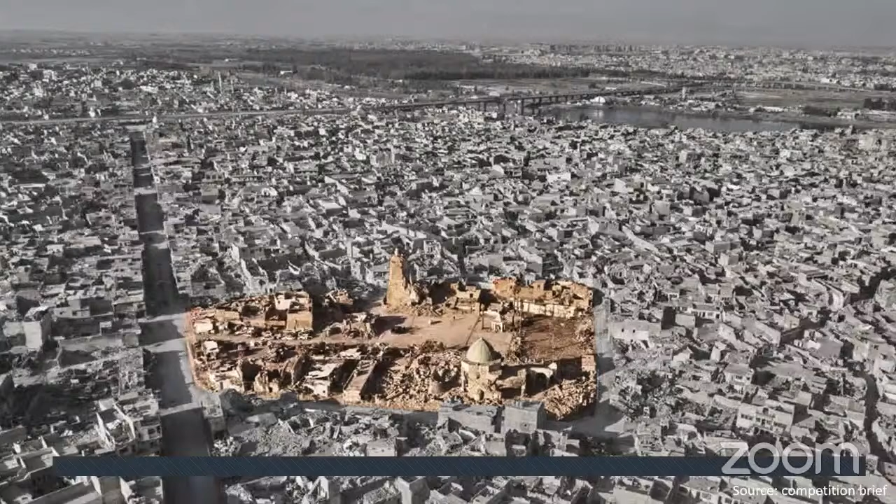So two issues were very important to us during the process of developing our proposal. Firstly, how could we come up with a project that would emphasize and empathize with the situation of the inhabitants of the city, which is certainly a devastated life. And secondly, how could we devise a proposal whose construction would serve to reinforce the bonds of the community, not only once it was built, but also from the very beginning of the construction process.

The possible answers to both questions coincided in pointing out that a salient feature of our proposal should be its clarity. It was not easy to achieve this clarity at the beginning. We had to discard many previous approaches of the project. We even had to give up proposals that seemed very attractive on paper, but we knew they probably would not suit the context and the circumstances.

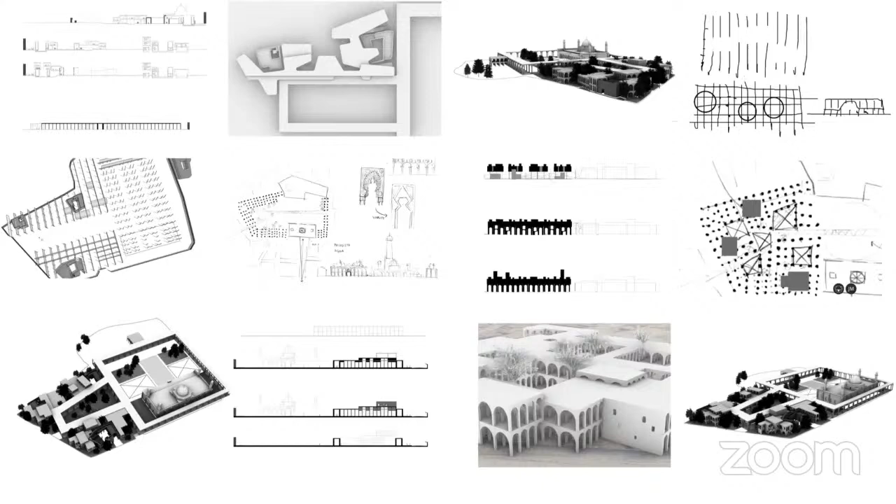So to achieve this clarity, we needed to work on two scales. According to the aforementioned questions, we had to work on an urban scale first, and then, to generate or reinforce a sense of community, we had to work at a constructive level as well.

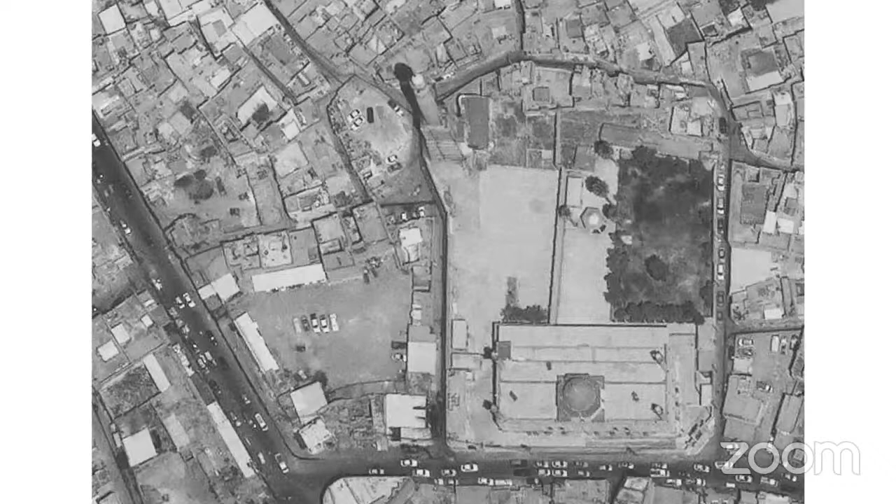The aerial photo of the site taken before the attack shows the position of the most prominent points of the site, such as the tomb of Al-Nouri to the north and the mosque to the south. According to the competition rules, the mosque should be reconstructed to restore the image it had before it was demolished. In addition, three traditional houses, similar to the one we showed before, had to be maintained and incorporated into the project.

The constructions located in the northern part of the site, next to the tomb and the minaret, would not be an object for intervention, but they should be taken into account because they could be the aim of further operations there.

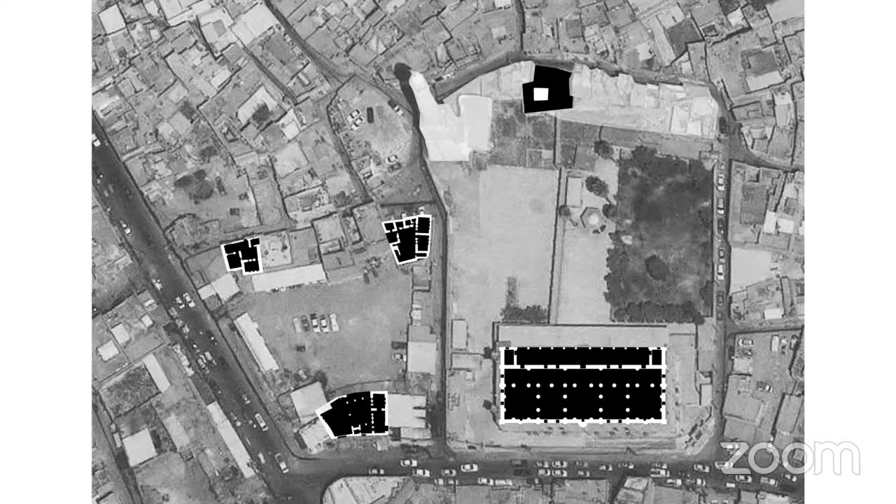Thus, the action would be concentrated mainly in the areas marked in this image. A school should be built on them with a playground and an architectural high school with a library, a small auditorium, and a cafeteria.

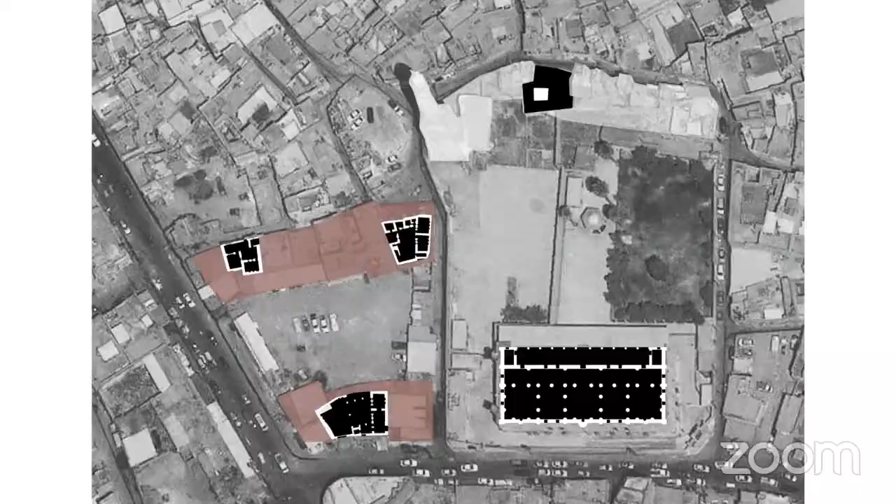So the solution we propose had as a fundamental premise the clarity we have introduced already. The layout of our proposal rested on a main element that was drawing the perimeter of the site, this portico, which at the same time was dividing the site into two clearly differentiated courtyards. One linked to the educational centers, and the other was shaping the zone or the prayer courtyard itself.

This provided a very clear sequence of open spaces leading from the main entrance to the complex, located to the west as it was required, and progressing to the prayer courtyard.

As well, this element, this portico or this porch, provided secondary accesses linked to the most important points in the urban fabric. The portico also serves as a connection and as a base for the organization of all the buildings that make up the proposal. Let me show.

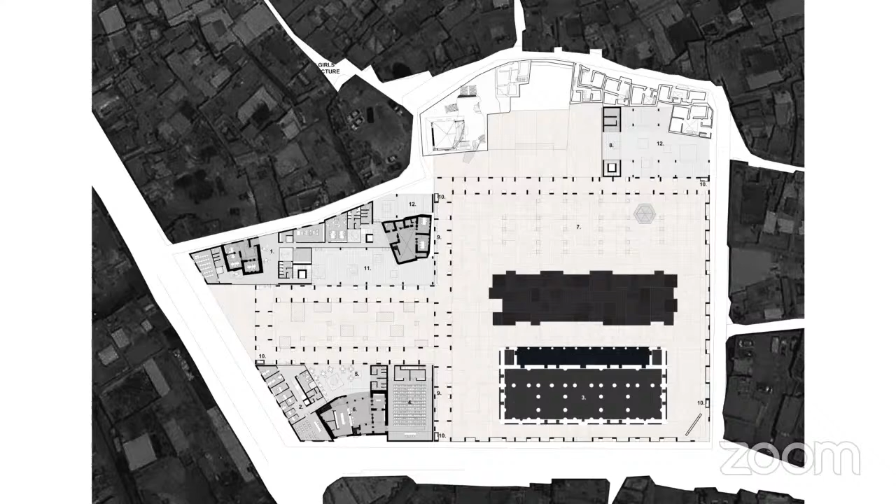We also thought about providing a delicate sheet of water in front of the mosque, so it would help us to reflect the image of the mosque itself and underline its importance within the complex.

The upper floors are similar to the ground floor and have the same idea. Here we can see the classrooms and the library of the high school and the offices of the north building as well.

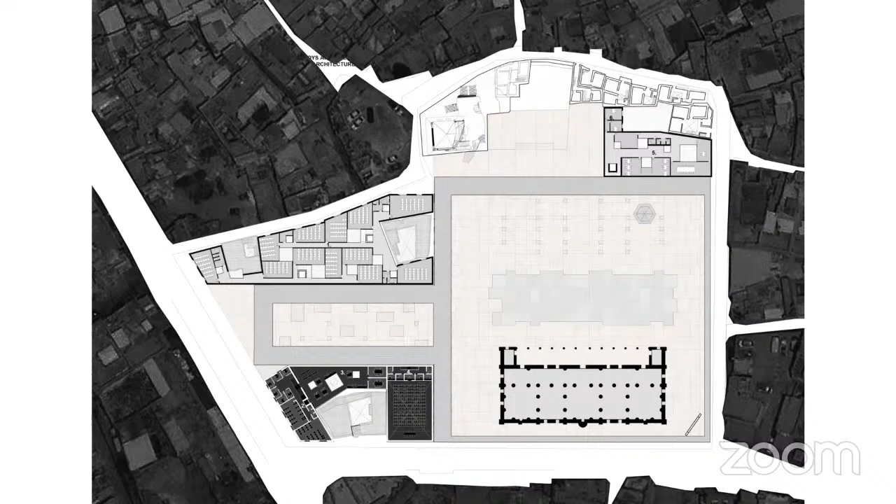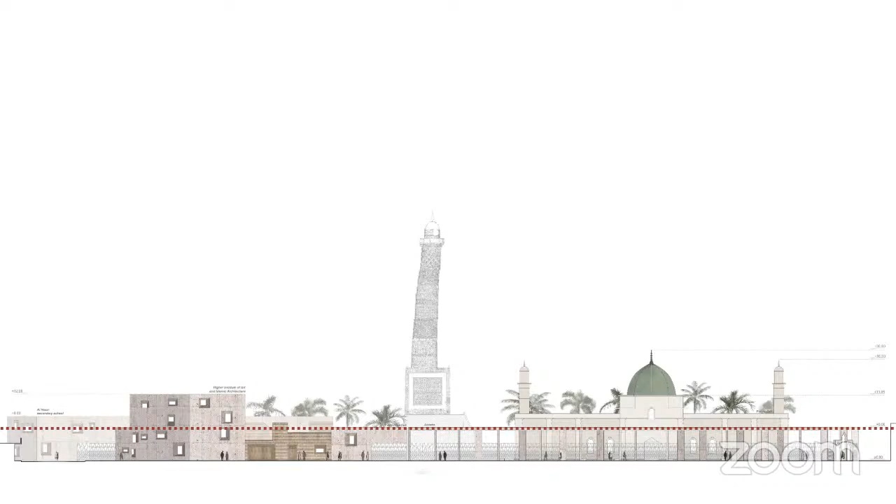In fact, one of the issues we had to pay a lot of attention to and work out carefully was the height of the portico. We set it at 5 to 6 meters, so it would in any case be lower than the mosque and would not compete with it in importance. We can see this in this image.

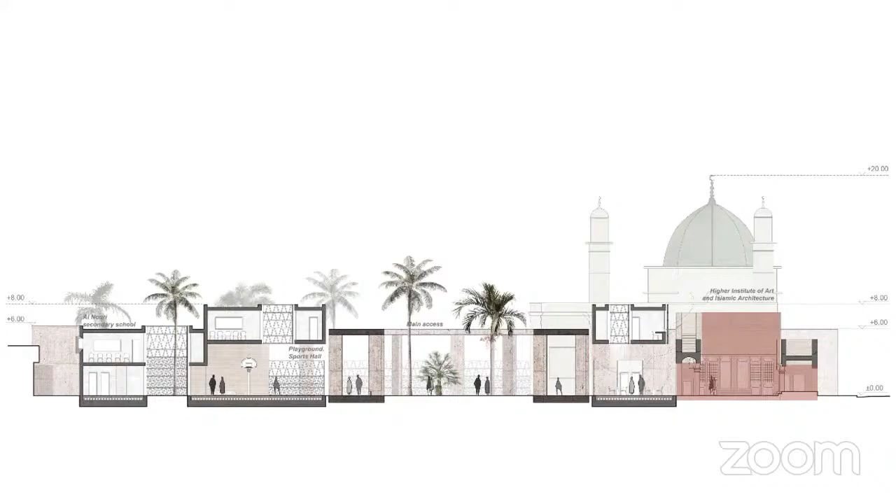At the same time, it had to give rise to an interesting section, which would allow the combination of spaces of different heights, such as the school playground, the cafeteria, and the foyer of the auditorium, as we said before. This image provides a summary idea of this concept.

Well, at a constructive level, we like to think that the simplicity and clarity of the design form would allow the reconstruction of the complex to be carried out with the great participation of the inhabitants of the city themselves, either by carrying out simple tasks that involve an apprenticeship they could then use in the reconstruction of their own houses or neighborhood, or because it involved the use of local knowledge and materials known to the craftsmen who had lived in the area, giving continuity to this knowledge and these traditions.

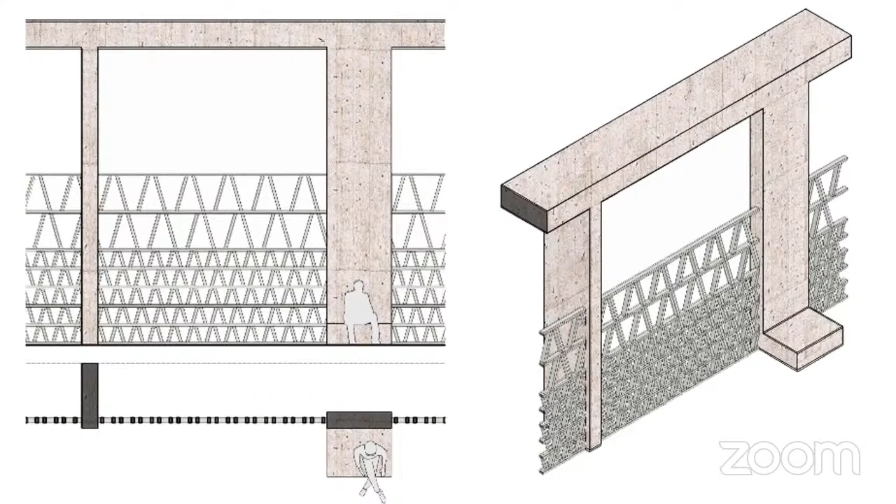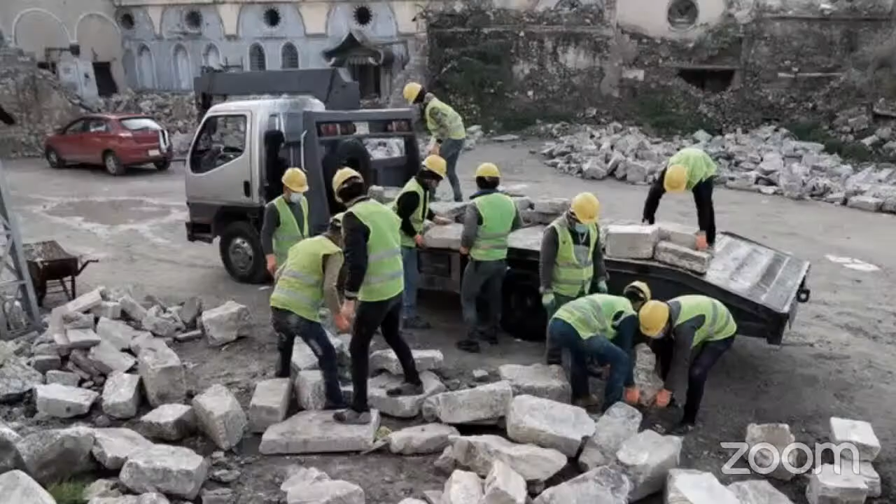The reconstruction of the mosque would be a slightly more complex procedure, I think. But it could be solved in a simple way because, as the images show, it seems that the recovery and cataloging operations have already been carried out on the remains. So the idea would be that in the reconstruction of the mosque, the different pieces of alabaster stone recovered would occupy their original place as it was in the original building.

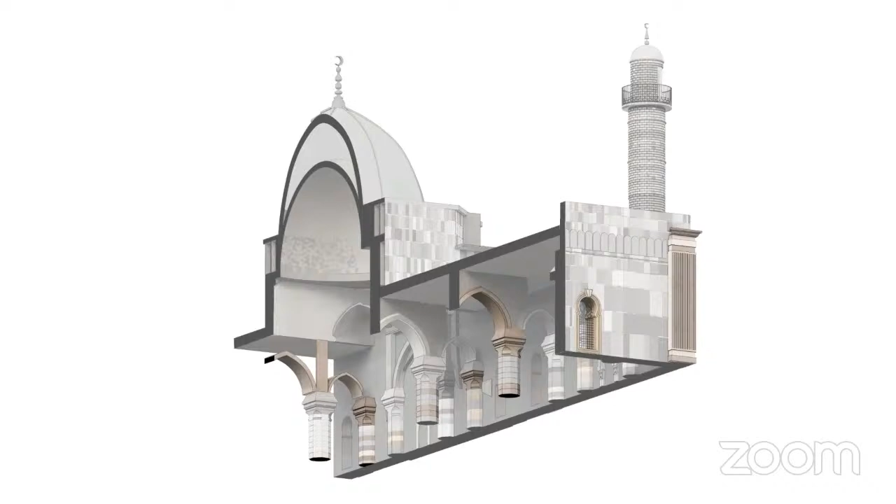The enclosure of the mosque, which has mostly disappeared, would be revealed with a double wall system, as we can see in this plan. For the construction of these walls, the rubble collected in the immediate vicinity or neighborhood of the site could be used. In this way, the mosque could be said to rise from the ashes of the city itself. We would like to think about this kind of system.

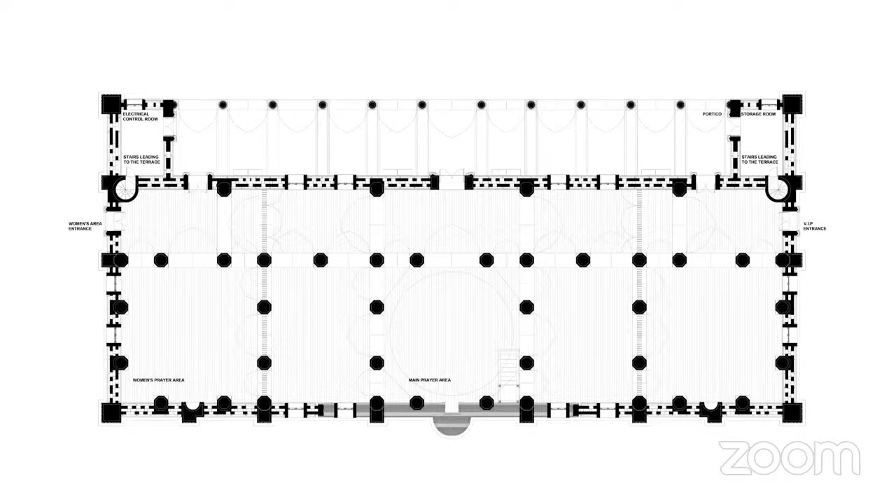These walls would have different perforations and holes in different places, as you can see in these details, and would also solve the link with the existing structure that has been retained, that is still standing on the site.

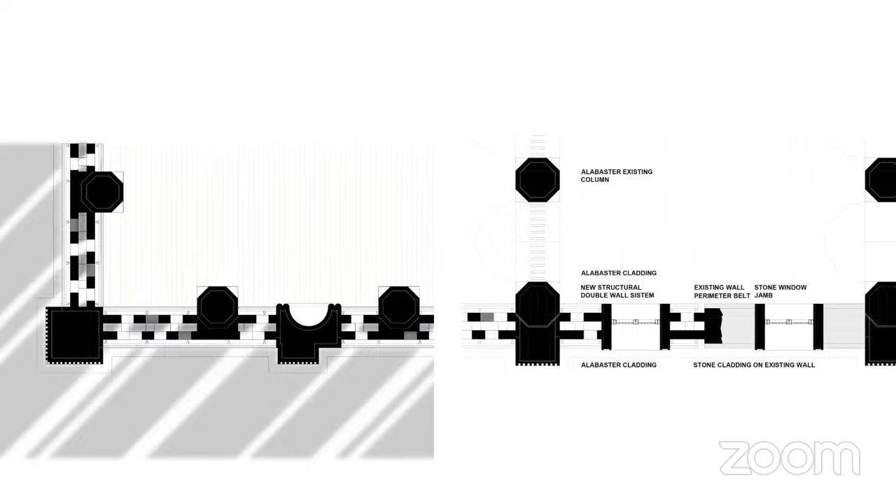But these walls, this double wall system, would be covered inside and outside with an alabaster cladding. This cladding would reproduce all the details carving the stone of the original mosque facade, but would also allow light to pass through it, both in the daytime, as we can see here, as well as at night.

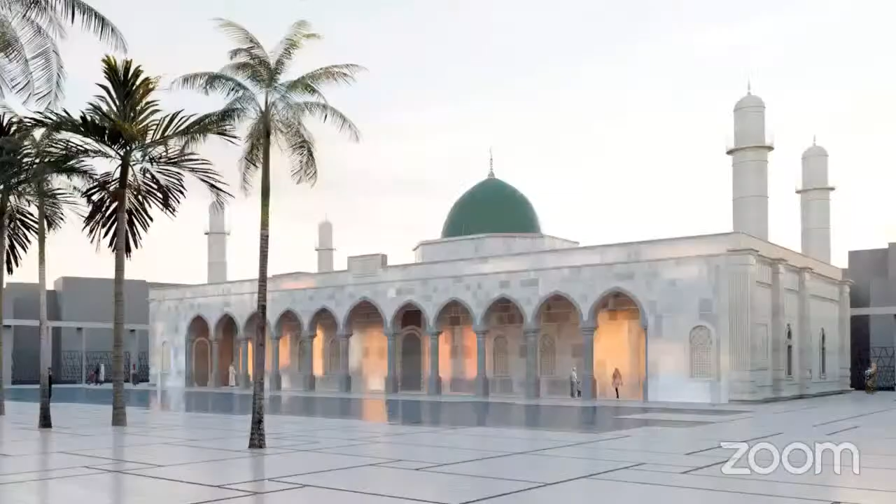This, in addition to differentiating the recovered elements from those that have been newly made, would give the mosque a prominent aspect within the complex. It would show a kind of warm light from it, as we can see in these images.

So thank you very much.